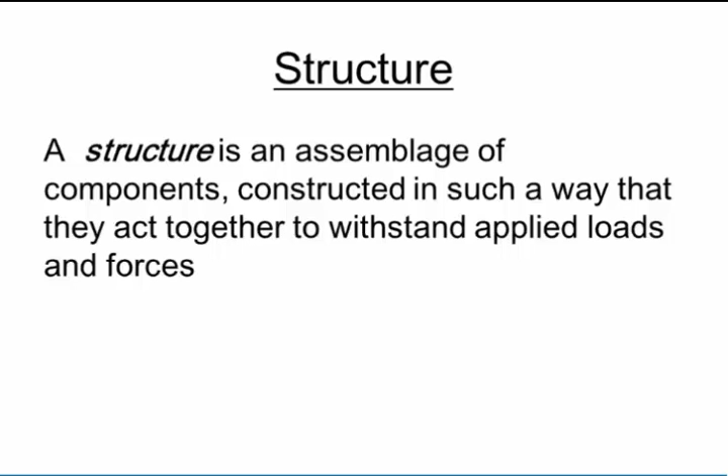So structural engineering, what's it all about? Structural engineers are involved basically in the analysis of structures, deriving forces, stresses, and deflections of the structures. They are also involved with the design of the structures, doing dimension calculations and selection of material types.

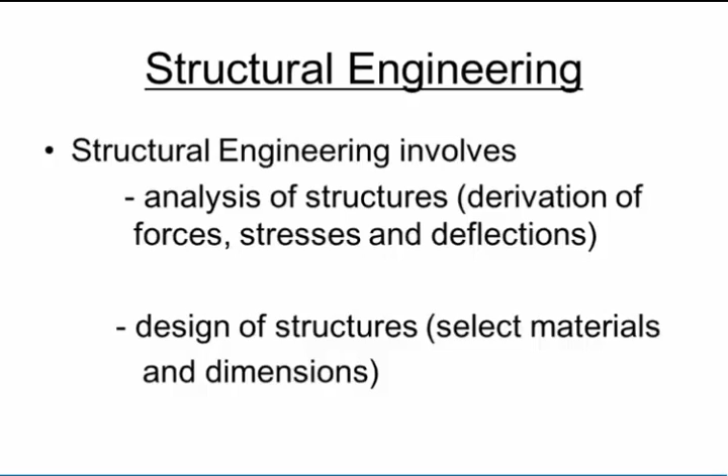The purpose of engineering a structure is firstly to ensure the safety, secondly the functionality, and also the economy under the most severe conditions during the lifespan of the design, whether that may be a bridge, a building, or any structure.

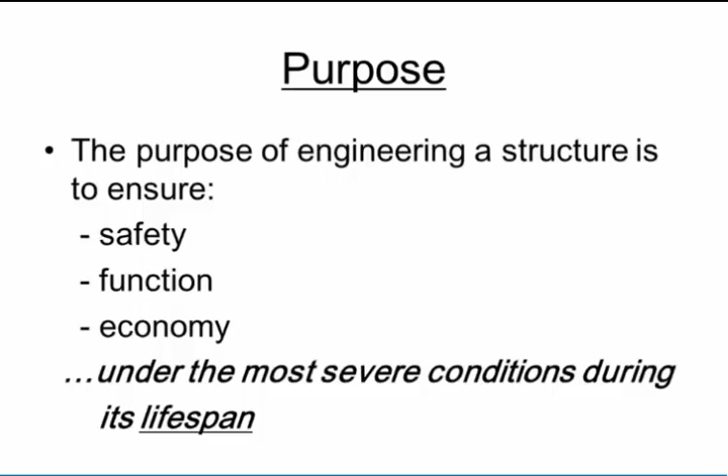Structural analysis, what is it? It is basically applying the principles of mechanics to determine firstly the distribution of load based on configuration, and secondly the induced force in each individual member.

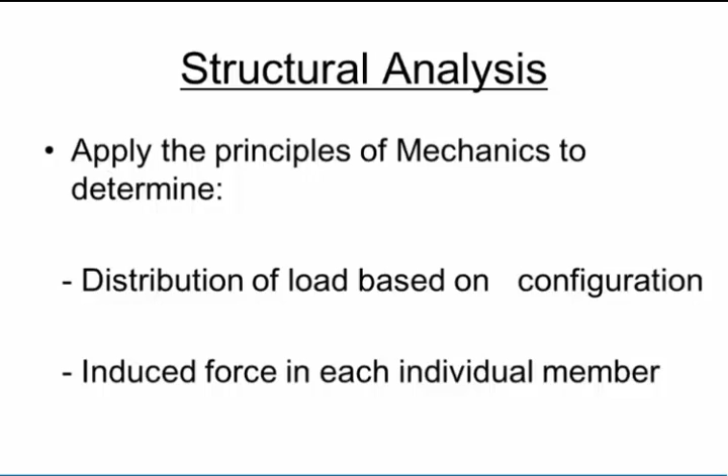The design part of it is basically to determine the combination of material and sizing for the members on the basis of the principles of strength of materials, to ensure non-failure of the members, acceptable level of deformations, and also overall economy.

Now guys, it is important to read through your study material. We won't have time to go through all the material in the slides, so it is important you pick up on things there that you need to apply. We are basically going through the basics, and you guys do need to read up.

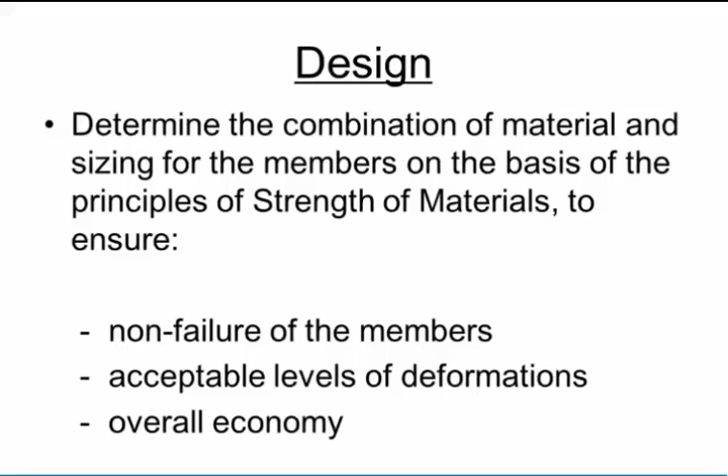So the available tools for structural engineers are basically computer programs, CAD basically, and also databases where they use material properties.

Objectives: firstly to understand the classification of structures, secondly understand the types of stresses and the resistance mechanisms of structural members, understand the load types and the stresses and deformation that they cause, understand the principles of mechanics and their applications, and also to use tools to analyze statically determinate structures.

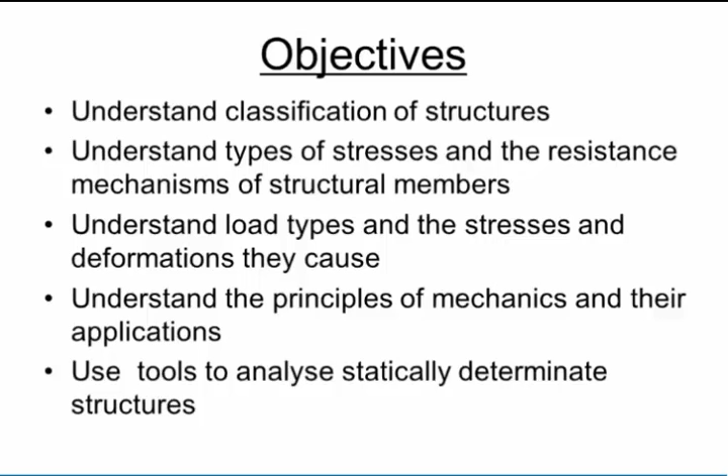Now, structure classification: firstly the purpose or habitation, industry or transportation, etc. The shape and form, like vertical columns, horizontal slabs, trusses, beams, etc. And also the procedure of analysis - is it statically determinate or statically indeterminate, is it unstable, is it 2- or 3-dimensional, etc. We'll take a look at all these.

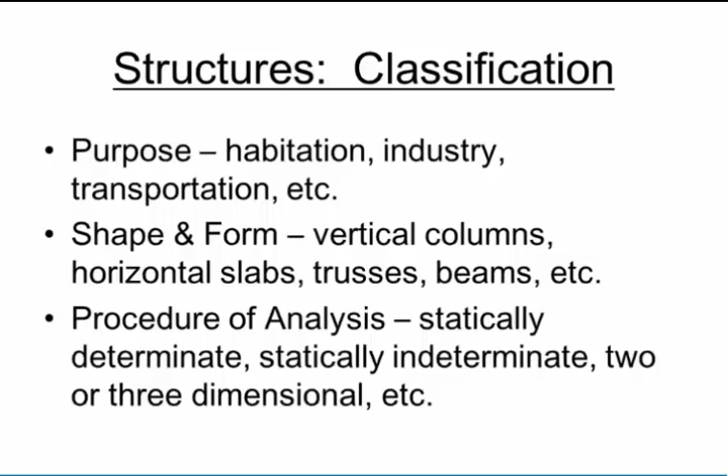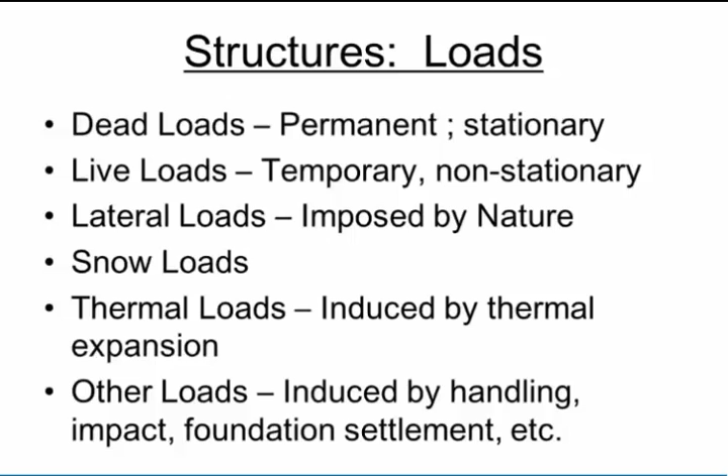The structural loads: if it's a dead load, that's permanent or stationary basically. Live loads are temporary or non-stationary. Lateral loads are basically imposed by nature. You also get snow loads, thermal loads induced by thermal expansion, and other loads induced by handling, impact, foundation settlement, etc.

Structures and member stresses: we're going to take a look at the type of stresses - tensile stress, which is basically axial elongation or stretching, and compressive stress, which is axial shortening. Bending stresses, very important, we'll take a look at the beam curvature. There's also shear stresses, which is basically movement on normal planes. And then lastly, torsional stresses, which is basically a twisting action.

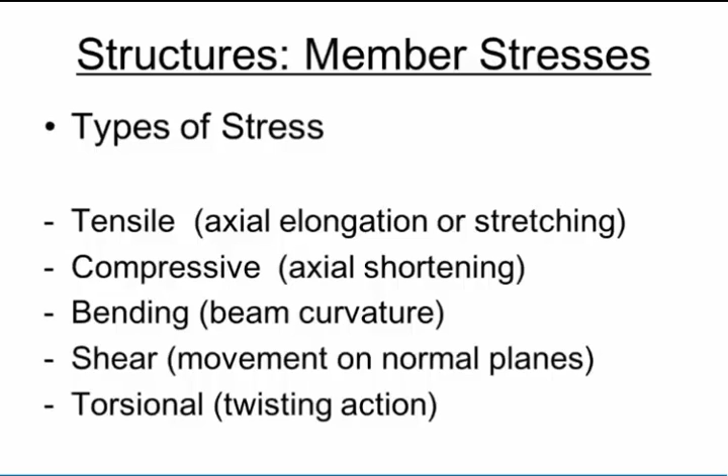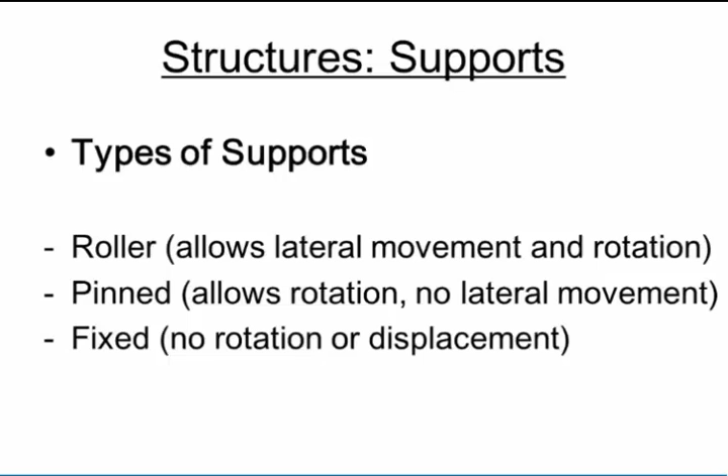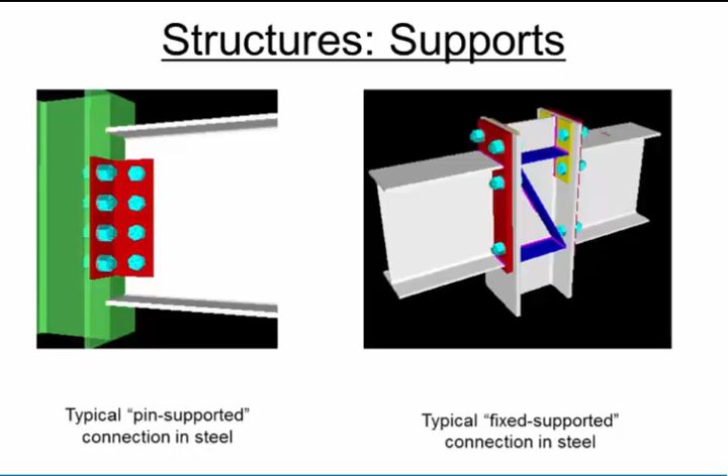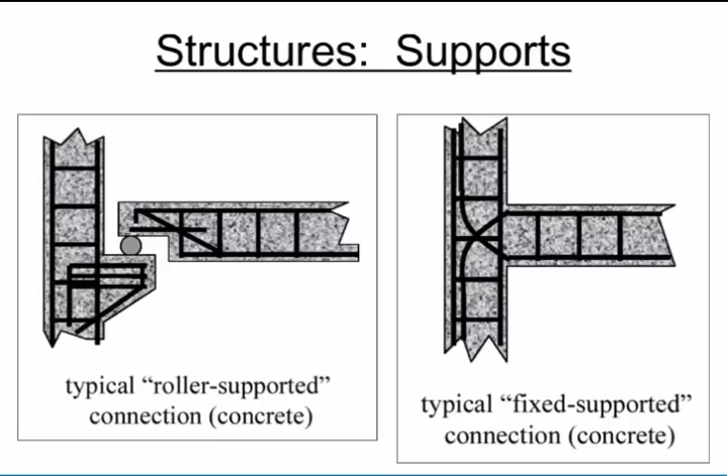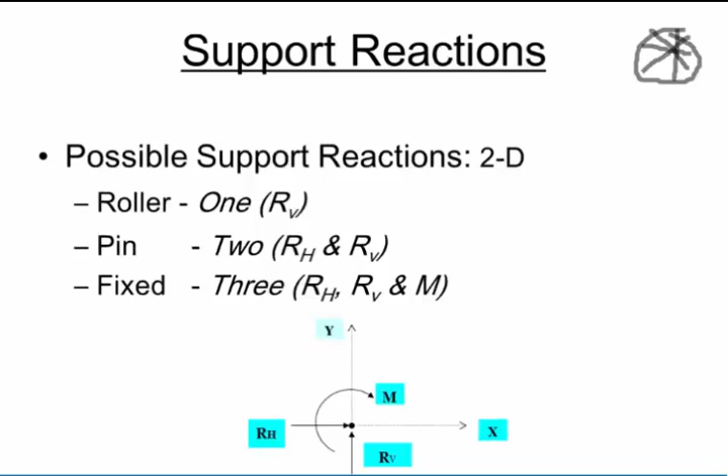Now the fixed one, and this is where it starts getting tricky. There's three reaction forces: the first is the horizontal reaction, the vertical reaction, and there's also a moment reaction, a bending moment basically.

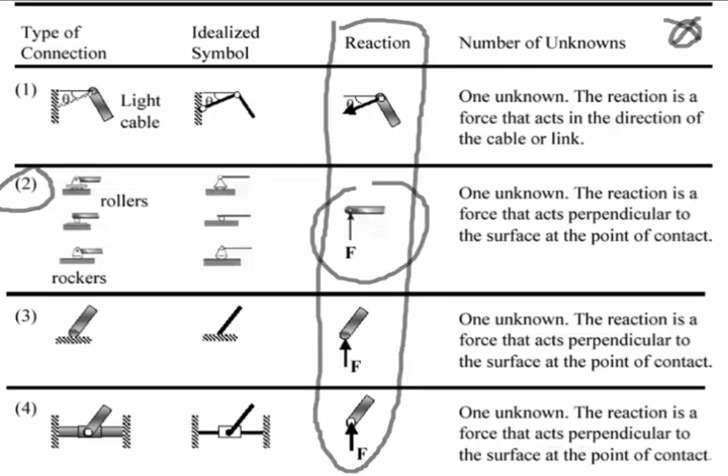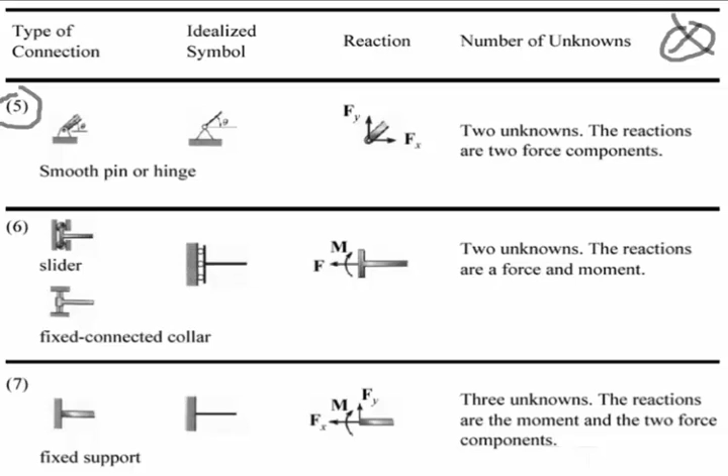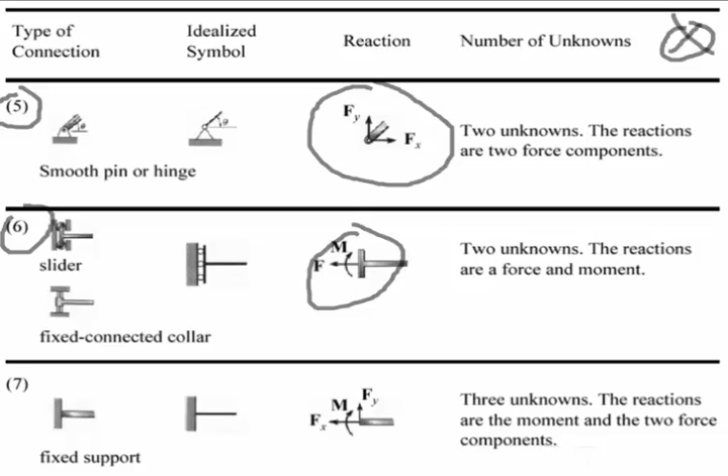Same with this one, also important, just to follow up on the previous slide. There's a pin reaction there, number 5, and you can see you'll have a vertical and a horizontal reaction on that, both unknowns. There's a slider reaction, and here you'll have a moment reaction starting to get involved. Fixed support, as I mentioned, is where you start having three forces: a vertical, horizontal, and a bending moment. And that's basically how you break it up.